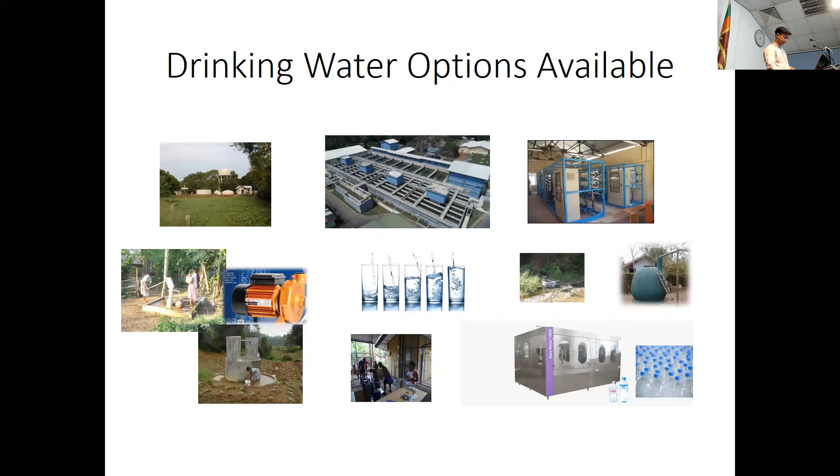And about sanitation, there are various options available, but the coverage through piped sewerage is quite small, around 2% of the population, and the majority are still depending on their individual latrines, and maybe they are connected to either a pit or a septic tank, which requires to be desludged every now and then.

What I need to highlight here is that we don't consider these pit latrines or ventilated improved pit latrines as an acceptable solution, whereas our neighboring countries are still counting this type of toilets in computing their coverage figures.

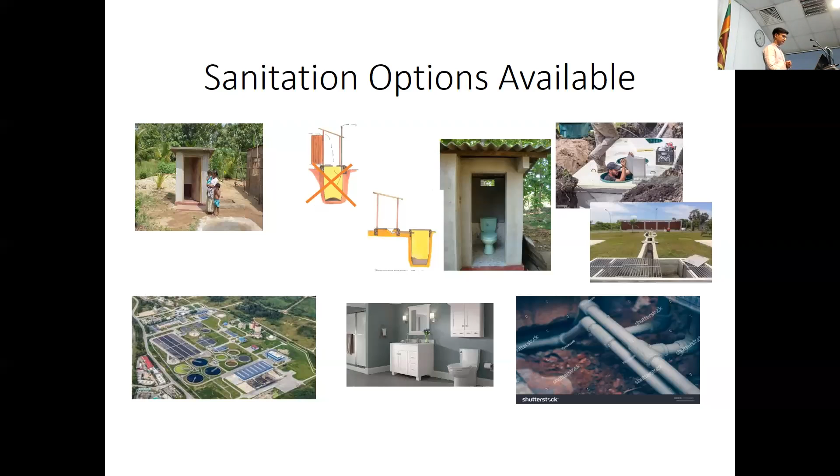And before the SDGs came, we have been following the MDG, Millennium Development Goals. Under goal number 7, there had been 7.8 and 7.9, concentrating on providing improved drinking water and improved sanitation with given targets, 84 and 84.5% by 2015. But we achieved that target well in advance.

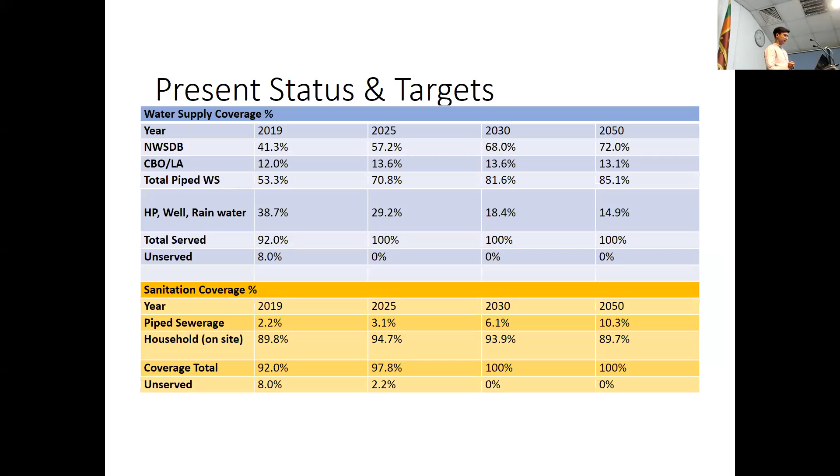And even today's figures are much higher, around 92% in water, and another 92% in sanitation as well. Only the point here is that for piped sewerage, the coverage is still very, very marginal, 2.2%. And we are planning to reach 100% coverage on water and sanitation both by 2030.

And when the sustainable development goals were introduced, sanitation and water were categorized under goal number 6, where 6.1 and 6.2 talk about universal achievement on drinking water and sanitation, while paying special attention to women, children, and other needy societies.

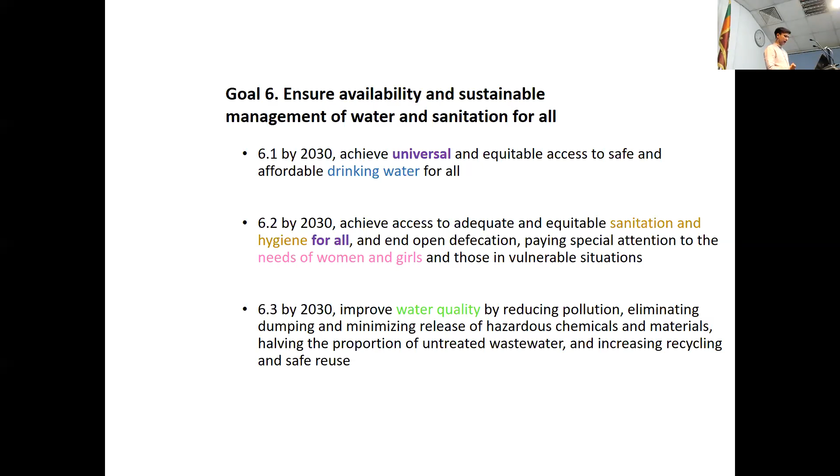And 6.3 talks about water quality, which is required to be fit for purpose. And 6.4 is water use efficiency to minimize wastage. And 6.5, the most difficult thing, integrated water resources management. And 6.6 is restoring water-related ecosystems for the benefit of the environment.

And again, 6.a and 6.b provide the provisions for external agencies to support the sector in developing countries that want the assistance, and also strengthening communities to manage their own services.

So when the SDGs came into play, they allowed all the countries to define the degree of the service level of water and sanitation. So in Sri Lanka, we have agreed that we will be providing water that is accessible, available, sufficient when needed, and also free from contamination.

And with regard to sanitation, we do not consider options like pit latrines anymore, and water seal facilities may be connected to either a septic tank or a pit, which would not contaminate the groundwater.

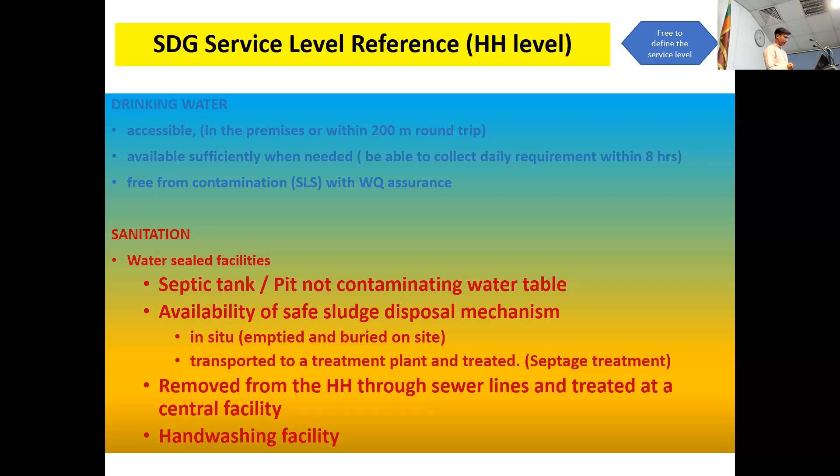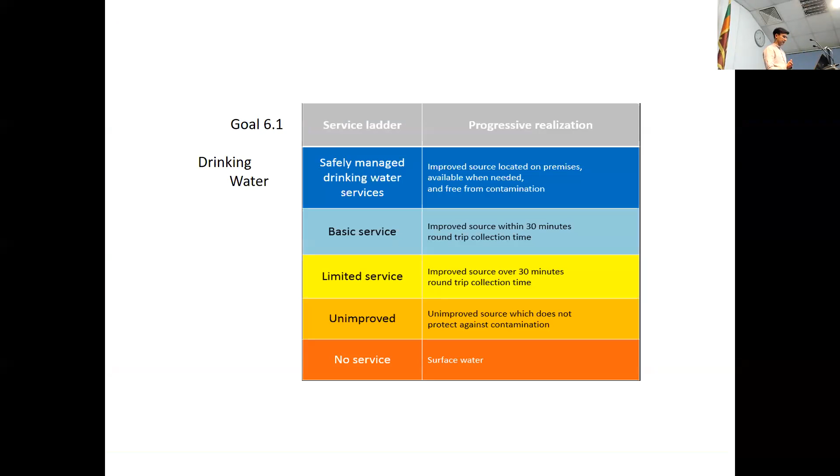So we need to help people climb this service ladder, starting from no service to unimproved, then limited and basic service, and finally reaching safely managed drinking water services. Similarly, in sanitation, we need to promote them until they reach safely managed sanitation services.

So what are the challenges in our engineering field? The first thing is water resources. We know that water resources are diminishing, and there are many issues with availability. So we need to pay attention to water resources development, new reservoirs on the ground, surface reservoirs, and groundwater recharging.

We are extracting water from the ground for our domestic and various other purposes, but we never treat or recharge the groundwater. So why not start something so that it is possible to recharge groundwater? There are a lot of empty aquifers, large, huge dry tracts available underground. So whenever we have rains or excessive rain, we can start diverting that rainwater into those aquifers so that later on we can extract it whenever needed.

And also we need to promote rainwater harvesting technology. We need to do that at a domestic level, and also need to assure water quality. Water quality in the sense that most rural people are still using well water, and we need to ensure their well water quality is fit for human drinking, and we need to work out some mechanism for that.

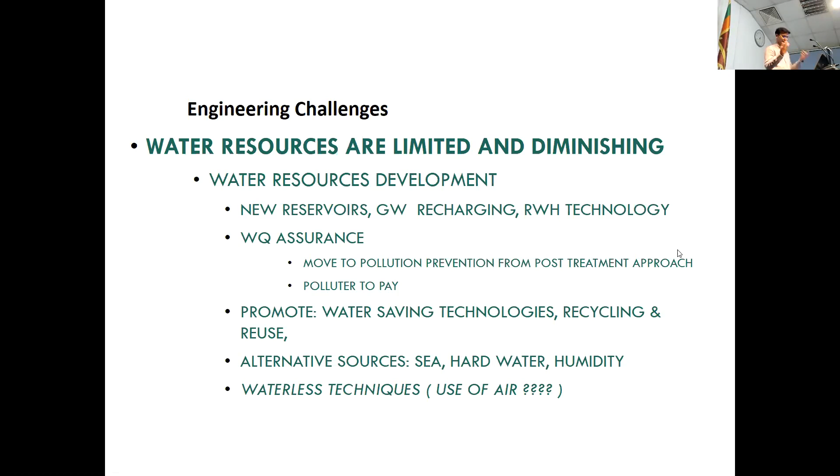And also the value of water is reducing. Nobody would believe it, but one good example is that the Water Board could not increase its tariff since 2012. It has remained as it is for the last 9 years, whereas the prices of all other goods are going up. Which means that the value of water is going down against the inflation line. So we need to match all this.

And also some innovative low-cost technologies with a lesser footprint, in the sense that we don't have much land now. So in urban cities we need to somehow compress all these treatment plants into a very small area. Because of the time limitation, I'm not going to talk much on the rest of the things. And also there are general issues.

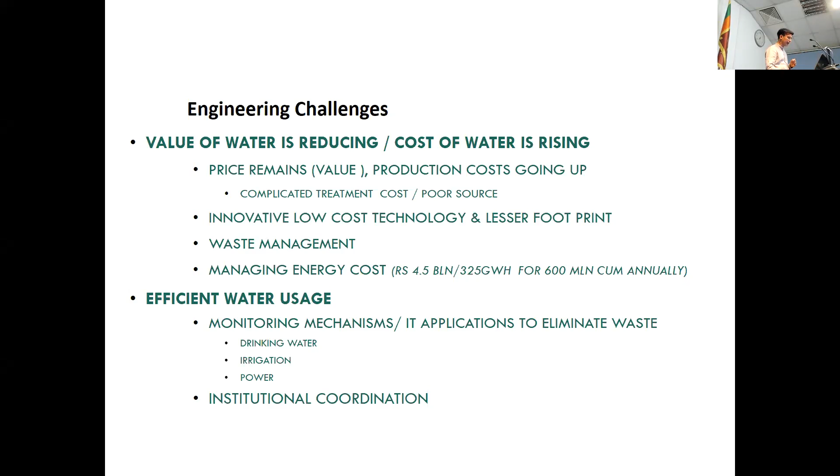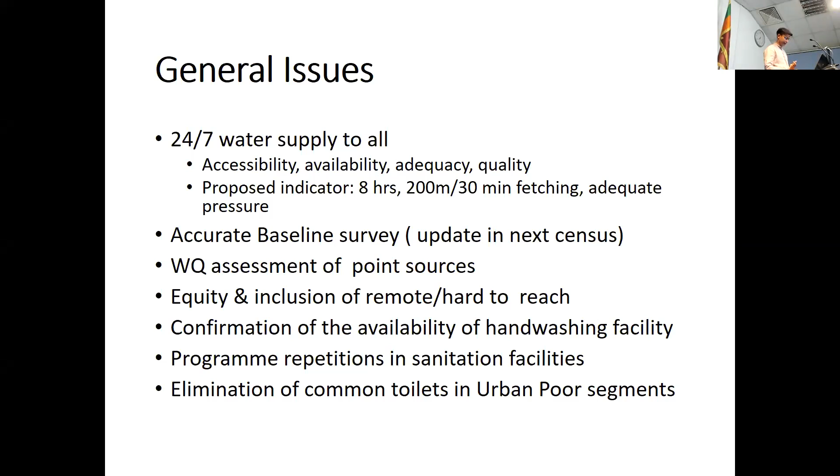Only one thing I want to highlight: program repetition in sanitation facilities. Remember that unlike other facilities, when we provide a sanitation facility for the rural poor, it reaches a dilapidated condition within about 10-15 years. We may have to repeat the program once again if they are still poor. So with that, I will conclude my presentation.

I took a couple of minutes extra. I'm sorry.